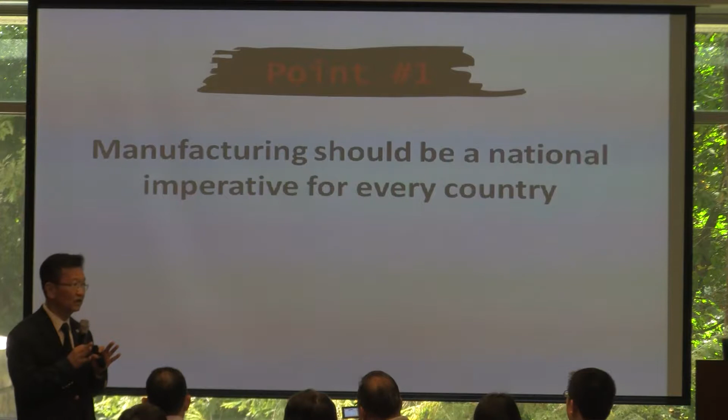Three things I would like to cover this afternoon. The first is to create a context for 3D printing. 3D printing doesn't exist in a vacuum, in a silo. There is a context where 3D printing creates value, and that context is manufacturing, especially advanced manufacturing.

The second point is that the manufacturing we're talking about here today is not the same manufacturing we used to know, with thousands of workers under one roof on an assembly line trying to push product out. That's much more labor-intensive manufacturing. But the manufacturing we're interested in is more like advanced manufacturing, or sometimes we call it Manufacturing 2.0.

And the third point is that 3D printing is game-changing. It's going to change many, many things around us. But there's a ton of work that we need to do before 3D printing becomes pervasive everywhere.

So, point number one: why manufacturing matters. This is a very important subject matter, and as Mr. Lee introduced me at the beginning, I'm really proud that all my professional life I have been working in manufacturing, from labor-intensive all the way to advanced manufacturing.

In the last, I'd say, 15 to 20 years, manufacturing was very much ignored in the U.S. There's a famous quote from someone who, under President Bush Sr., was chairing the Council of Economic Advisers. He made a famous quote, which I hope he regretted, saying computer chips and potato chips, what's the difference? $100 of computer chips and $100 of potato chips is still $100 of chips. It was a big mistake, because to make computer chips you need high tech, but to make potato chips you may not need high tech. But perhaps I'm wrong.

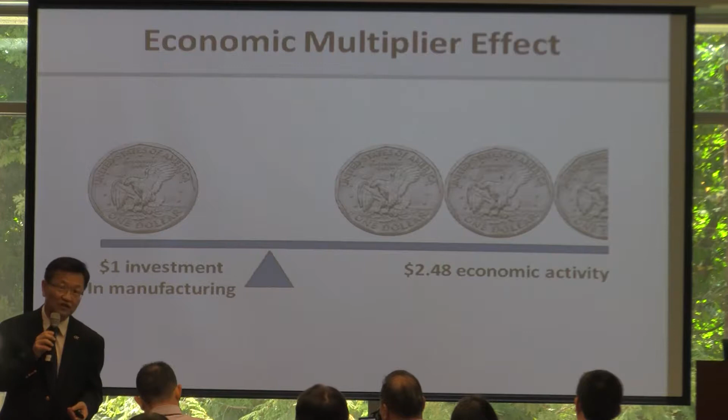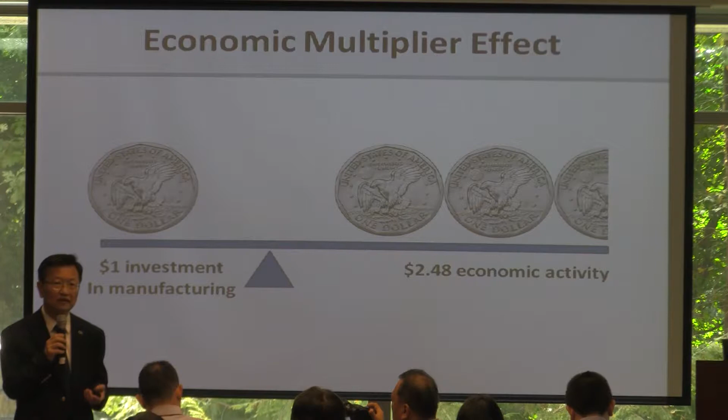Number two is the return on investment. For every dollar we invest in manufacturing in the US, we see about $2.50 of activity in the whole economy. That's a very good return on investment. Nowadays if you can get 3% interest you're happy, but we're talking about 250% returns on investment. This is a very good investment in the United States, especially since these activities drive very good jobs—middle class jobs, not low service type jobs.

The third one is amazing, I think it will surprise you. 90% of the patents in the US come from manufacturing. Even though manufacturing accounts for about 12% of economic activity, 90% of patents—somewhat equivalent to innovation—come from manufacturing. So manufacturing drives wealth, manufacturing drives jobs, manufacturing drives returns on investment, and manufacturing drives innovation. Manufacturing is very critical if a country wants to be strong.

So that's the context of 3D printing and manufacturing. Now the second thing is the manufacturing we're talking about today is different from the old manufacturing.

More than 2 years ago, in June 2011, the White House announced the Advanced Manufacturing Partnership. The goal is to bring back manufacturing and create a stronger manufacturing sector in the US, and in turn drive job creation and job retention. The White House created a steering committee of 18 members: 6 university presidents and 12 CEOs of large US corporations. This was announced more than 2 years ago.

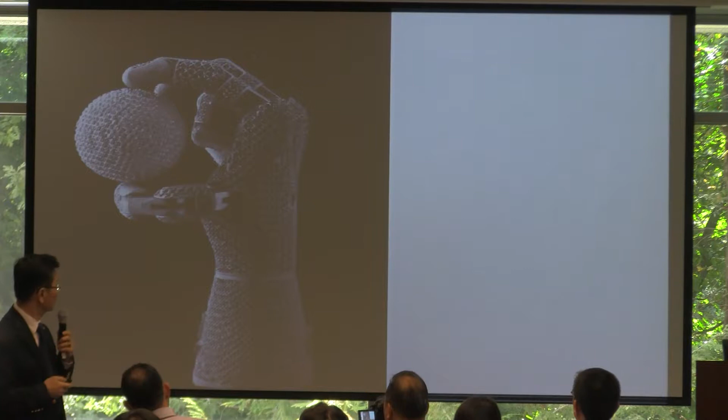That's additive manufacturing. What you see here is something that cannot be produced using current manufacturing technologies other than additive. Look at all these little grids and meshes, with the flexibility achieved without machining and without much assembly. This was done entirely in 3D printing, and I circulated a part—Mr. Lee, if you haven't seen it, feel free to use it. That whole piece was done in one setup.

So we didn't make different parts and assemble them together, glue them together. That's all done in one setup. Now, if you think this is really too industrial, and this one is perhaps more personal, the evening gown is made entirely with 3D printing.

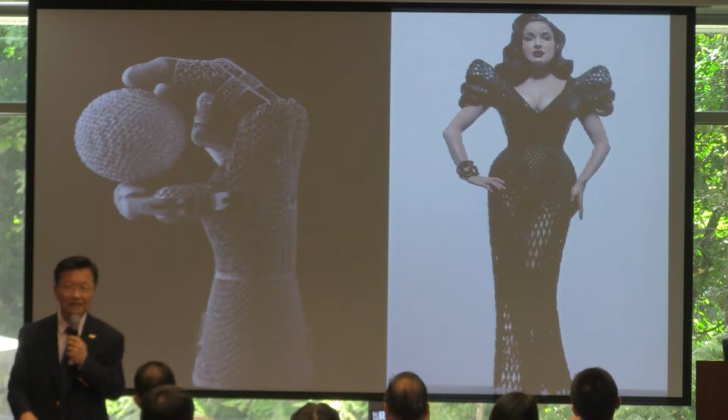It shows how pervasive the process is. If you read the news online or in paper form every week, you see articles about 3D printing. It's almost everywhere. But what I'd like to do today is give you the current state of the art, what is possible, and what are the hypes reported in the news media. I want to give you a more balanced report on 3D printing so we begin to know if there's a path forward, and if so, what we should do to overcome the obstacles.

So my tagline for the third topic is: 3D printing is going to change a lot of things that we do, but there's a lot of work that we have to do first. So let's start with a basic definition. Just exactly what is 3D printing? I've been talking for about 15 minutes and I have not explained what 3D printing is. So here is a definition.

Three steps, very simple. First, you design, you prepare - we call it pre-processing. You design your part, could be that part I just circulated, could be that evening gown, could be that robotic hand, could be the bottle with the cap. You design it in a computer-aided system. I think all of you have heard of or even developed your own CAD systems. You design your part, and then you let the algorithm slice your part into pieces.

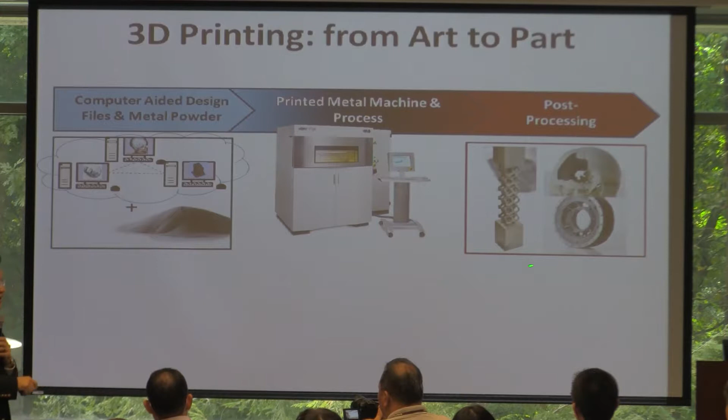If you ask Christopher, he likes this part, he loves this part, he hates this part - because it's very time-consuming, a lot of tedious work. You have to clean up the parts before you can show them to other people. Most articles don't talk about this; they say you designed it, you printed it, you're done. In fact, you have to clean it up. So that's the reality.

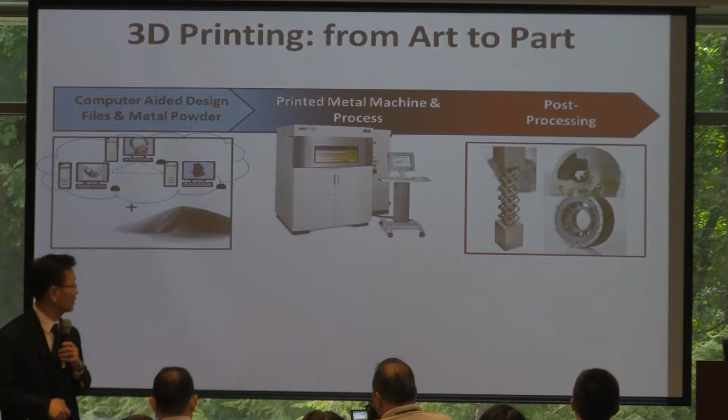So let me show you a quick video produced at Oak Ridge National Lab. The quality of the lab footage is really not that great, but I think you get the idea. All right, I'm going to talk from here - let me back up a little.

It's called Arcam. Arcam is a company in Sweden - a Swedish company. They produced a direct manufacturing printer. The technology they use is called electron beam - it uses very high energy to melt material and deposit it. Arcam is the name of the company.

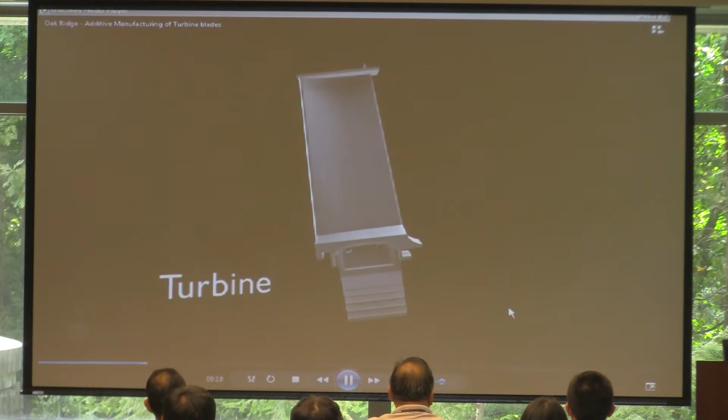But with 3D printing, we can do it differently. I'll stop here because you can see that a computer algorithm actually slices it - each slice is about 100 micron thickness. This is all done virtually on a computer system.

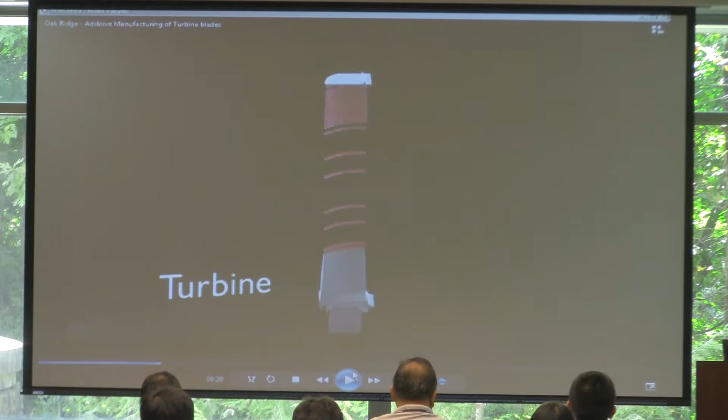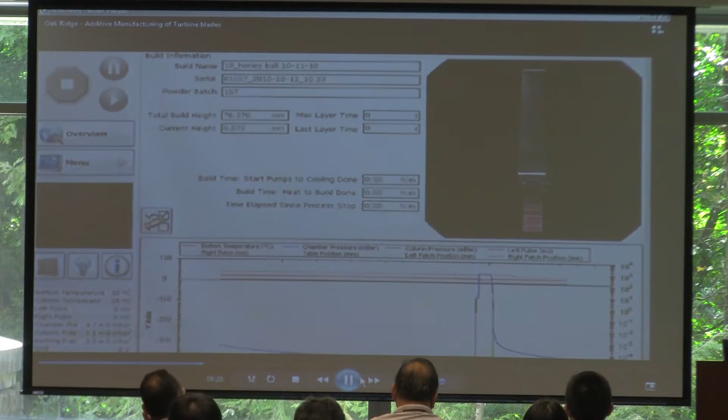So once it's completely sliced, the file gets sent to a printer, which in this case is made by Arcam. You can see right here there are two tanks.

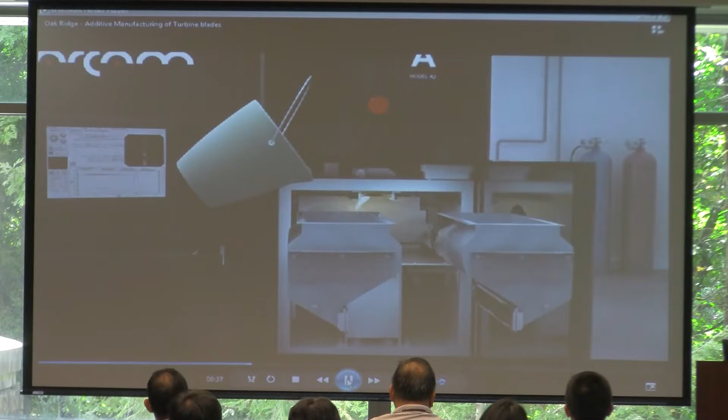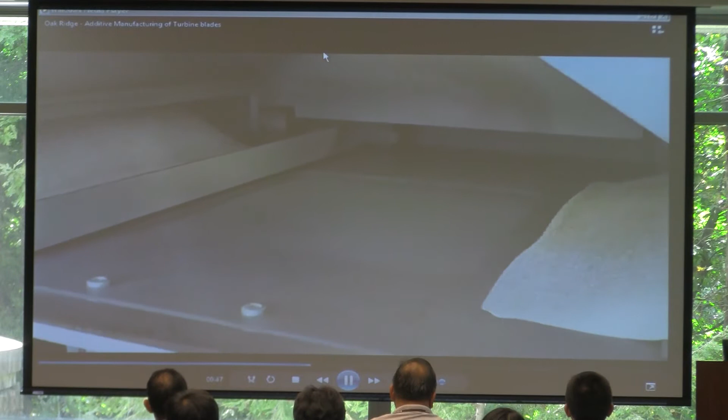Each tank is filled with metal powders. The reason we have two, one on each side, is it goes back and forth so we can save time in depositing the materials. You can see some metal powder here, then we prepare the material, heat it up, and then there's a laser.

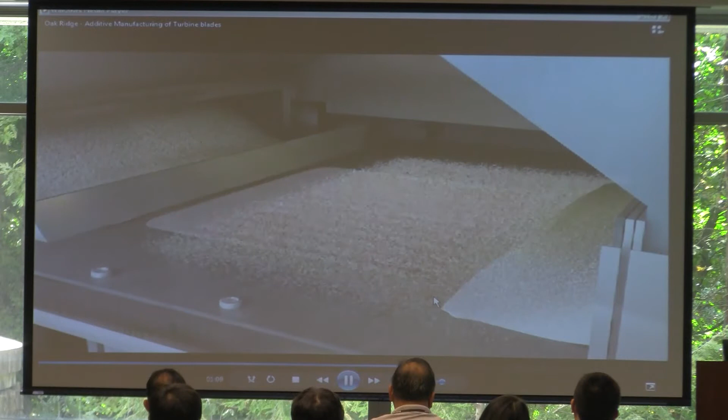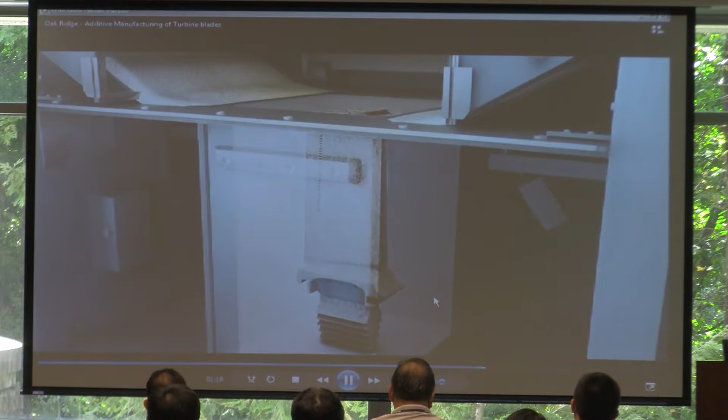So the first layer is deposited. This shows microstructurally how the materials actually change their morphology and structure. The second step, third step, it goes back and forth until you have a blade. It shows it grows as time goes, and then it's created. You can see the platform lower and lower to accommodate the growth of the part.

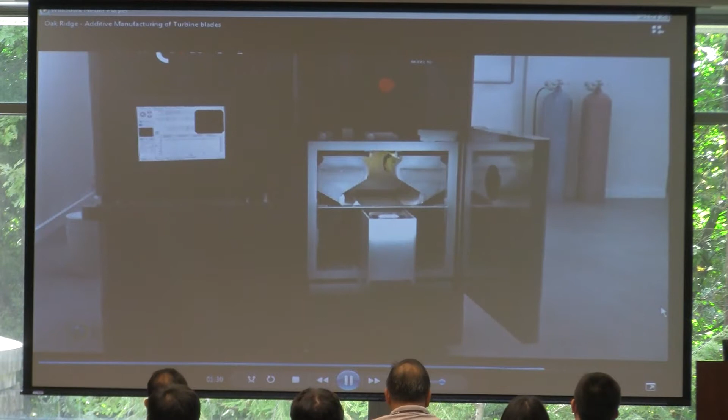So this is what a 3D printer looks like by Arcam. This is what you get out of a 3D printer. It doesn't look really pretty, and doesn't look like a turbine blade, but this is before post-processing.

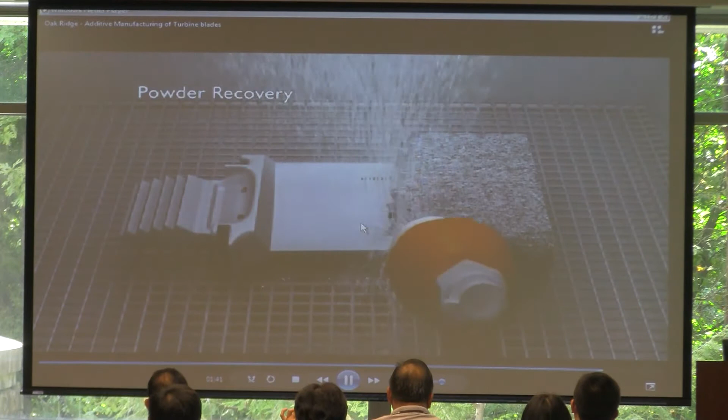Again, the cartoon makes it look really easy, but actually it's just very difficult. So that's the video. Now you get the ideas: you design, you print, and you clean it up.

If you look at cleaning carefully, you use, for instance, air to blow the loose metal particles away. The hope is you can reclaim the material and put it back in the tank and reuse it. But most of the materials have been subjected to this high temperature environment, so microstructurally they have changed. They are not like virgin metal powders.

So how do we reclaim the materials so that you can use it together with the original material? That is a big issue, but very few people actually talk about it in open literature. If you are a businessman, you of course care about the raw material cost, and that is a big issue.

Most professors don't really care about it. They just produce it, see we have a good part, and look at the dimensional stability.

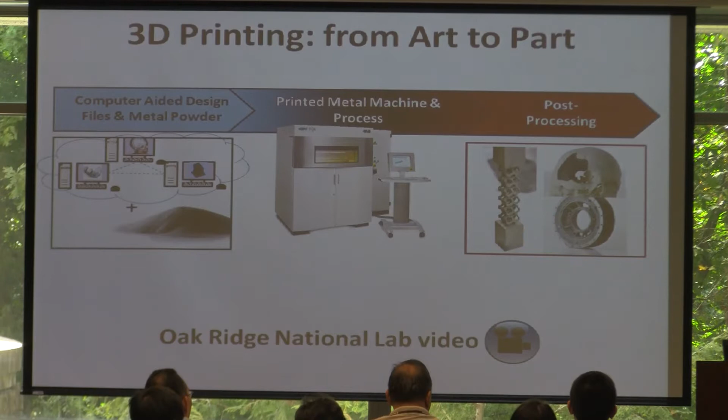Technically we can put additive manufacturing into 4 different categories depending on the material we use. The first is plastics. The plastic 3D printing started about 25 years ago, and it was called rapid prototyping. Some of us a little more experienced remember this rapid prototyping from about 25 years ago, started actually in the United States.

But then people looked at the plastics—they look interesting, but we cannot use them directly in any serious applications. So the technology was sort of ignored in the US and then moved to Europe. The Europeans brought the technology to a level where they can process metals, process ceramics, and also print electronics.

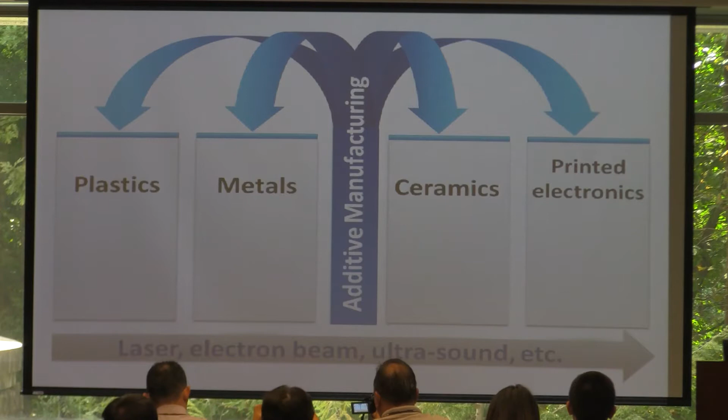If you look across the bottom, these are the different energy sources we can use to process the material. For instance, we can use lasers, the most popular one, or electron beams, very popular for metal, and we can use ultrasound to prepare materials for printed electronics.

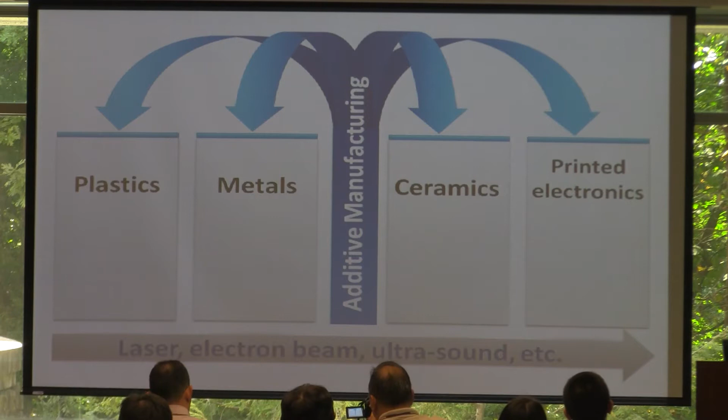Most people, when they talk about 3D printing, focus on the first two, sometimes maybe ceramics, but very rarely do people actually mention printed electronics, which I think is a mistake. Printed electronics should be part of the big family of additive manufacturing.

So what are the applications, in addition to turbine blades, a robotic hand, and even guns? These are the applications: aerospace—you just saw a video from engine parts to turbine blades to many other parts, ducts, and connectors. And then for cars it's similar.

Many different applications, but my view of the difference between automotive and aerospace is the following. In aerospace, if you are making a batch of, say, hundreds of parts, that's high volume for aerospace. But in automotive, you have to make a million, so that's high volume. Additive manufacturing is more suitable for low volume production than for high volume production.

So it would be inconceivable to see people begin to 3D print all the cars, from Chevrolet all the way to Porsche. For automotive application, I believe additive will be used initially in making molds and tooling, jigs and fixtures in mass production. So it's different—one is for direct printing of parts, and one is printing of molds, tooling, jigs and fixtures.

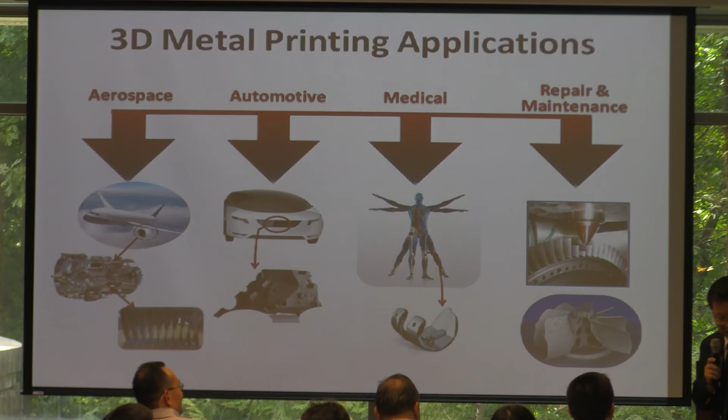Using today's U.S. dollars, to create a brand new foundry the capital investment is about $8 billion. If you're making parts for iPhones or Samsung phones or other phones in very large volumes, I think the volume can justify the cost. However, if you're dealing with aerospace, defense, or other companies, or the repair aftermarket, you're not talking about tens of millions - you're talking about thousands, maybe hundreds, just a few parts. In that case, I don't think you really want to invest $8 billion in a foundry to make a few hundred parts.

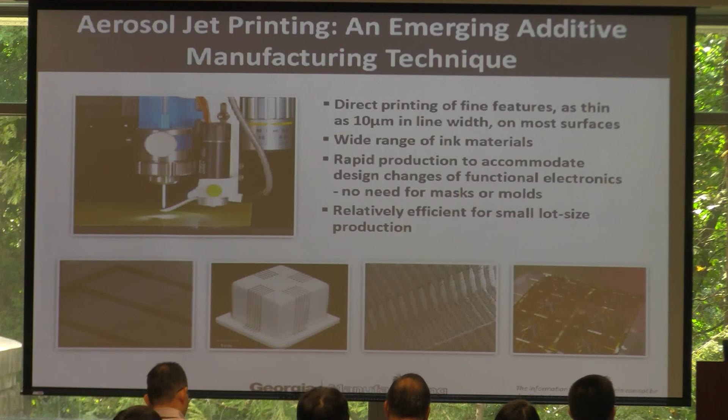So that's where additive printed electronics comes in. You buy a machine, design your circuit, and you can print the circuits right there in your lab. Printed electronics is very efficient and cost effective. Now, it's somewhat similar to inkjet printing, but very different in how the materials or inks are prepared.

In inkjet printing, you have droplets - you just spread it and drop it. If you look at the ink coming out of the nozzle, it's like a cone, so you cannot control it well and the resolution isn't very good. However, for the aerosol jet, it atomizes the ink and uses air to direct the flow almost like a straight line. If you look at the cross section here and here, it's almost the same - like a straight cylinder as opposed to a cone.

So in that way we can control the resolution, which is about 10 microns. Another advantage is it has a very good standoff distance, about up to 10 millimeters. What this means is that the nozzle and your substrate - the material you print your ink on - can have up to 10 millimeters of distance. That's very good.